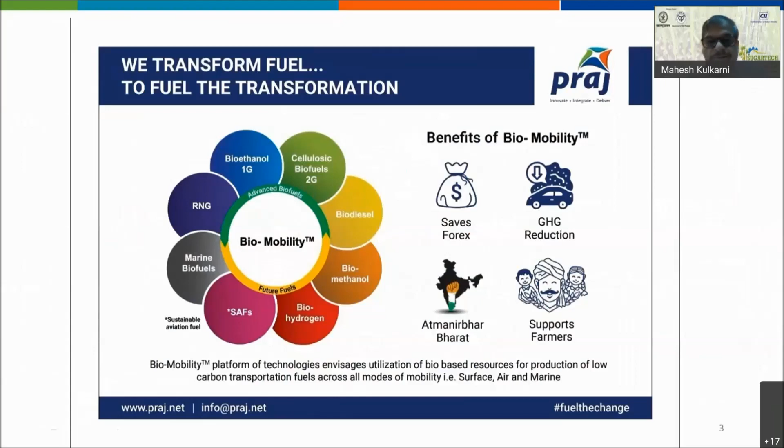If you see today, the sugar industry has a dilemma in context to policies and government initiatives. Perhaps there is surplus sugar in the market, then there is a dilemma that sugar mills are operating seasonally. So whether there will be availability of alternate feedstock for the production of ethanol, which is the need of the hour in context to the ethanol blending program.

Then, as very rightly mentioned by Narendra Mohan sir, statutory compliance for zero liquid discharge. Some plants have conventional technologies like biomethanation followed by BMSW evaporation and composting. But now mandatory is the incineration boiler route, where you have to completely burn the concentrated spent wash into ash and generate steam and power, managing the overall balance in the sugar industry as well as the attached ethanol plant. The fourth important challenge in front of the sugar industry is water scarcity and carbon footprint.

Over a period of time, we are always talking about water scarcity, especially for the distillery, which is designed for zero liquid discharge. In that context, we have to recycle all the recycle streams available in the process plant and manage the problem of water scarcity.

On the other hand, there is one more point which is perhaps unaddressed by the sugar industry or ethanol industry in India, that is the carbon footprint. Today we are talking about greenhouse gas emissions, and we are exhaling carbon dioxide through our fermentation plant, contributing to GHG emissions. It's not only carbon dioxide, but VOCs, volatile organic constituents, that also go out into the environment. So we are very much adhered to the Paris Accord in context to carbon footprint. You must have seen in Glasgow that our government is very bullish on achieving the carbon footprint targets.

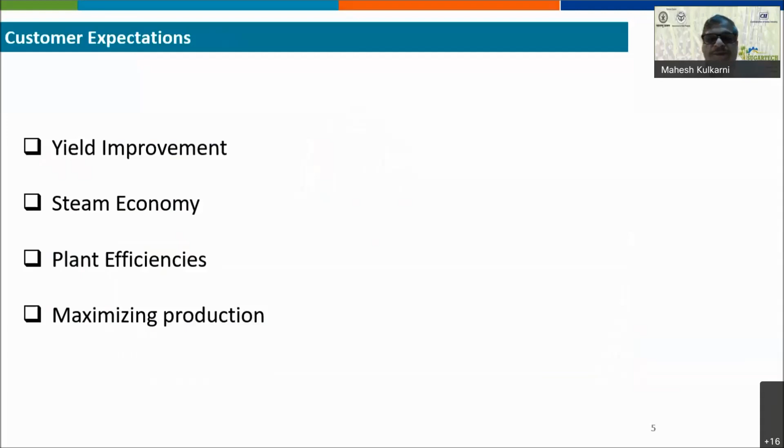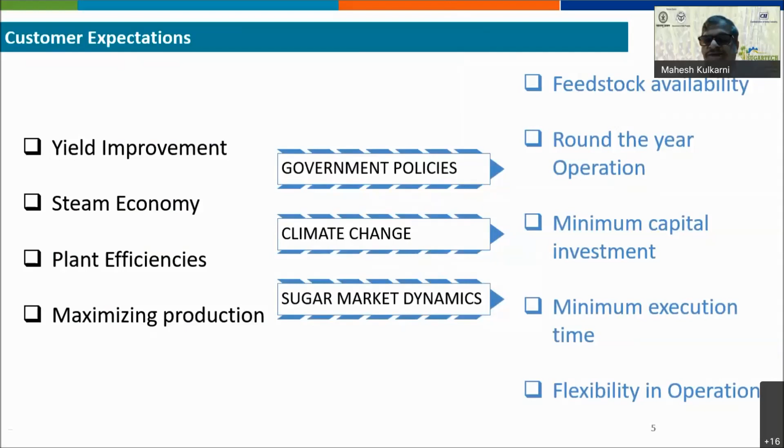So in context to that, what are the customer expectations? Perhaps yield improvements, steam economy, plant efficiencies, maximizing production—that are given. But most important, the expectations are feedstock availability. Can we operate the plant round the year? How can I increase the capacity of the existing facility with minimum capital investment? What will be the execution time? Because there will be tenders coming up for the supply of ethanol.

So we want to produce ethanol with higher capacity using the existing assets within the minimum execution time. And most important is the flexibility in operation. When I say flexibility in operations, today we are very much focusing on a plant designed for multi-feedstock. So it is not only the raw materials available from the sugar industry, but also alternate feedstock, including grains.

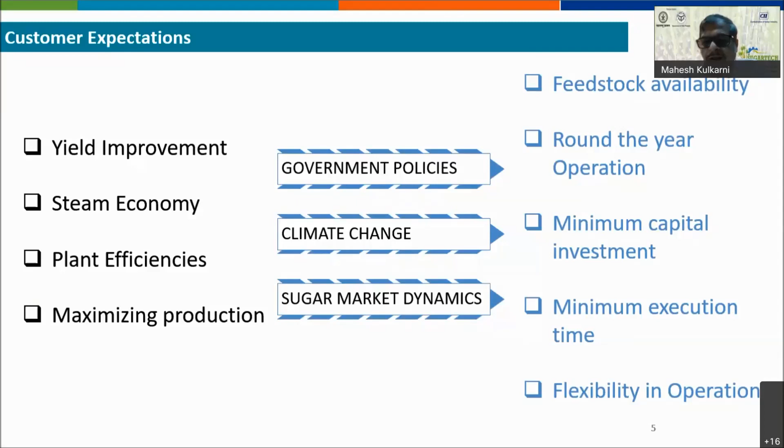So today's scenario, to achieve this demand, we have to design a plant in the context of multiple feedstock. As far as Praj is concerned, Praj is perhaps the only company who has studied feedstocks across the globe, and more than 7,000 samples have been collected and tested at the Praj Matrix Research and Development Center. This data has helped Praj develop advanced technologies, accommodate various recycle streams into the process plant, and deliver efficiencies as well as yield.

Praj being an innovative company, we have proven the technologies. We have commercialized many disruptive technologies since the company started, perhaps from 1985, and every year we are launching new technology. We are commercializing technologies for the sugar and ethanol industry.

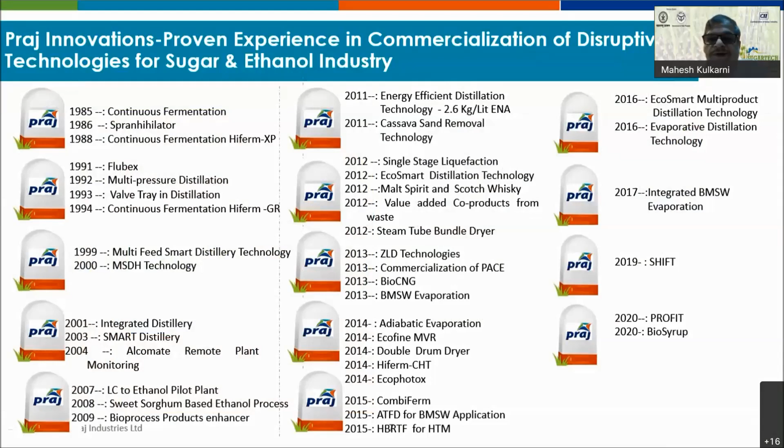So for value maximization in the context of the sugar industry, what are the various feedstocks available to convert into ethanol? Perhaps molasses, C, B heavy molasses, sugarcane juice, sugarcane syrup, and for new government policies, we can also use bio syrup. That way we can reduce sugar production and divert that sugar for round-the-year operation of the distillery.

So sugarcane syrup and bio syrup would be the add-on raw materials coming from the sugar industry. These multiple feedstocks help in asset utilization as well as giving flexibility to run the distillery for round-the-year operation, meeting environment norms with appropriate technology, and connecting to the future production of multi-feed and multi-products.

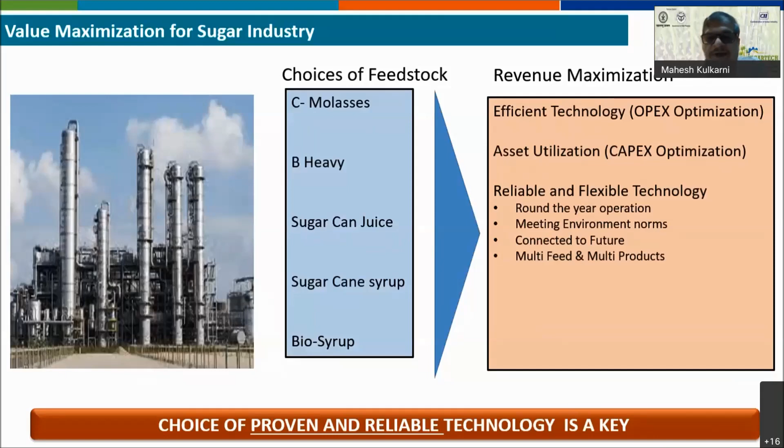So today we are talking about only beverage alcohol, but today the distillery complex is well upgraded with advanced technologies and can flexibly produce not only beverage alcohol or fuel ethanol, but including pharma and perfumery grade ethanol with advanced technologies.

So when we are talking about sugarcane syrup as a feedstock, definitely there are advantages. Using sugarcane syrup, we can run the distillery for extended days of operation along with C molasses, giving an opportunity to maximize production of ethanol. Also, this feedstock doesn't have any dependency on other feedstock or fuel. It also gives flexibility in operation in balancing sugarcane production with ethanol production. Most importantly, it increases capacity by up to 50% with minimum investment.

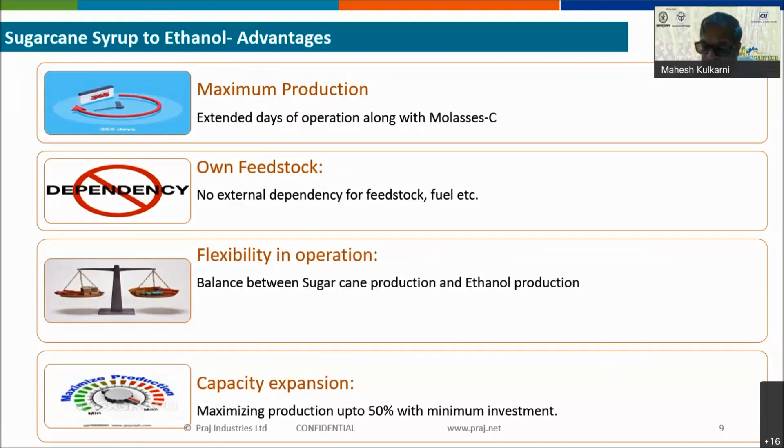But there are certain challenges when we spoke to various industries, and we received feedback that there are certain challenges when using syrup as a raw material. What are the observations or feedback from the sugar industry? Almost 8 to 10% lower ethanol yield. Then almost high spent wash generation, especially 6 to 6.5 liters per liter of alcohol. And it has low total solids because there are no more inorganic solids, unlike molasses C.

Another important thing is the low spent wash concentration going to the boiler, because today most distilleries have an incineration boiler as the zero liquid discharge effluent treatment system. The concern is that spent wash concentration is 40 to 45% using existing evaporators. Another important thing, especially in context of fermentation, is that sugarcane syrup is devoid of minerals and nutrients, which increases fermentation time and demands addition of supplementary nutrients into the fermentation.

Higher support fuel consumption in the boiler due to high evaporation duties, which I mentioned earlier. Frequent corrosion of some equipment in the ethanol dehydration plant. Extended time cycles in fermentation because of deficiency in nutrients. And most important, contamination of the syrup during transportation from sugar mill to sugar distillery. These are the major concerns shared by the industry in connection with syrup challenges.

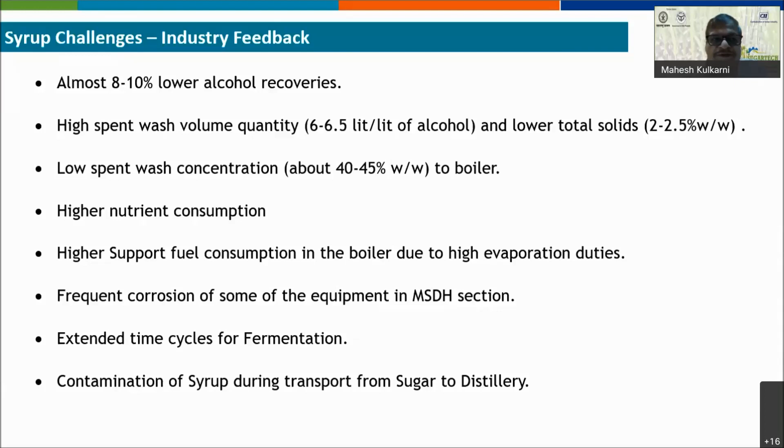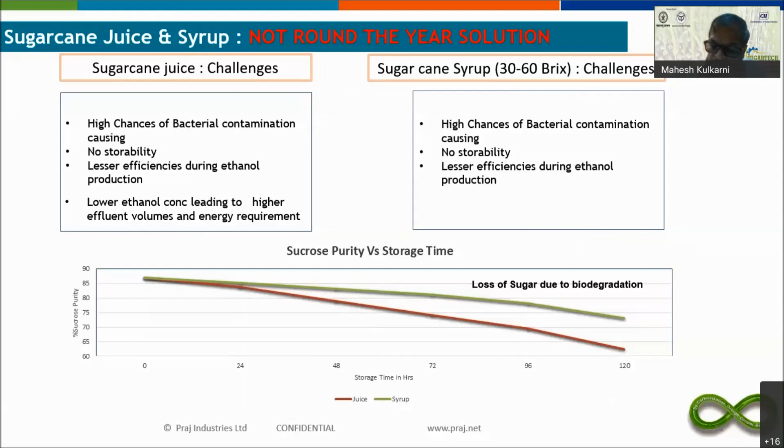So perhaps sugarcane syrup cannot be said to be the option or feedstock that gives a round-the-year solution, as mentioned, due to some challenges, especially contamination. There is no possibility of storability of this syrup in storage tanks, and there's less efficiency during production. What we have seen in the storability of syrup is the purity versus storage time - there is a loss of sugar during storage because of bacterial contamination.

That's why Praj did the work at the Praj Matrix Research and Development Center and developed the technology called bio syrup. This is a proprietary technology developed by Praj.

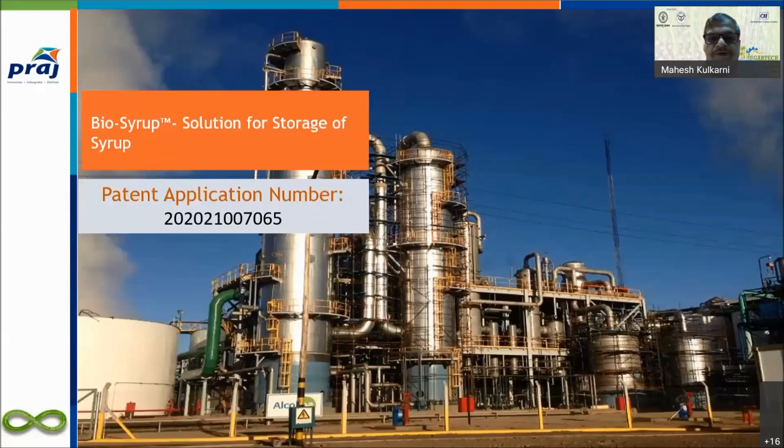Biosyrup is the only solution in context to the storage of cane syrup in the storage tank. Biosyrup is nothing but inverted sugarcane syrup, concentrated up to 82 to 85 degree Brix to maximize the shelf life of the cane juice.

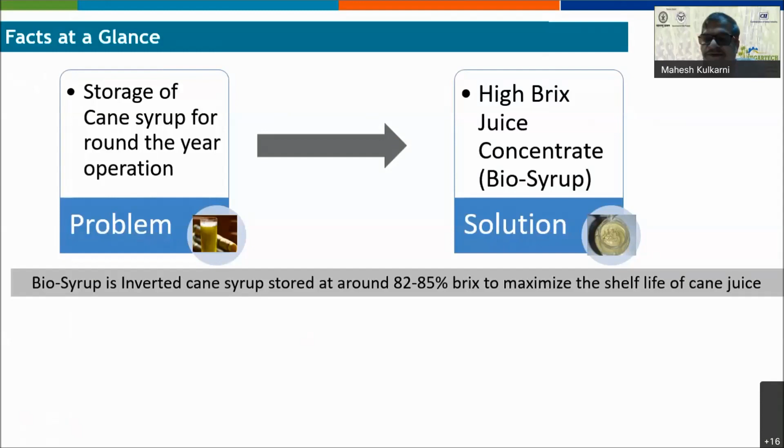Praj invested money in the installation of a commercial demo plant, because Praj never launches technologies unless they've been proven at the pilot scale and at the commercial demo plant. So we have success stories. Even in the second generation, we have set up a commercial demo plant near Pune.

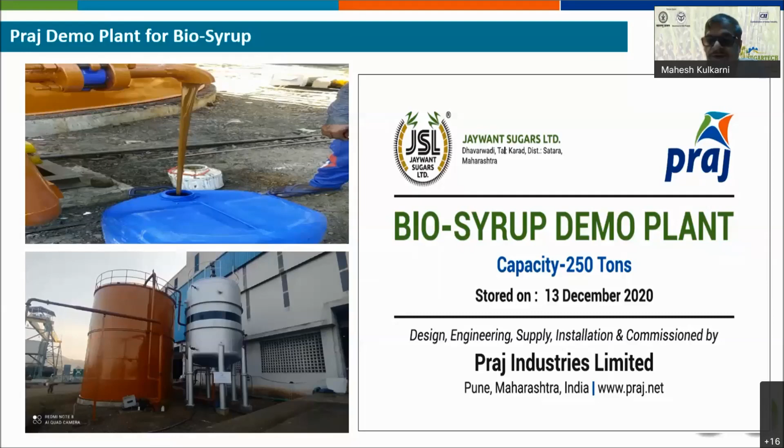We invested money and set up a plant at Jaywant Sugars Limited, and we have proven that the syrup can be stored in storage tanks. The quality of the syrup stored in the storage tank has been tested, evaluated, and approved by the Vasantdada Sugar Institute, which confirmed there is no loss of sugar even during 6 months of biosyrup storage in the existing plant conditions.

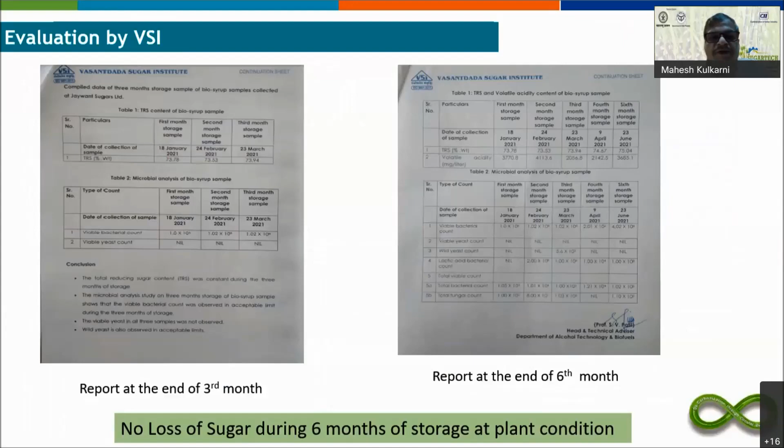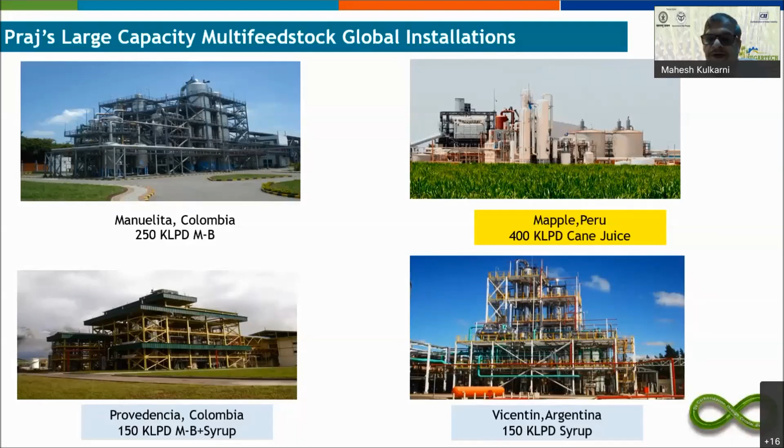For multiple feedstock based on syrup as raw material, we have multiple installations across the globe. In Colombia, we have multiple plants with a capacity of 250 kiloliters per day, operating on B heavy molasses as well as syrup. In Mapple, Peru, it's a 400 kLPD sugarcane juice to ethanol plant. And in Argentina, we have 150 kLPD. So there are multiple references based on sugarcane syrup across the globe.

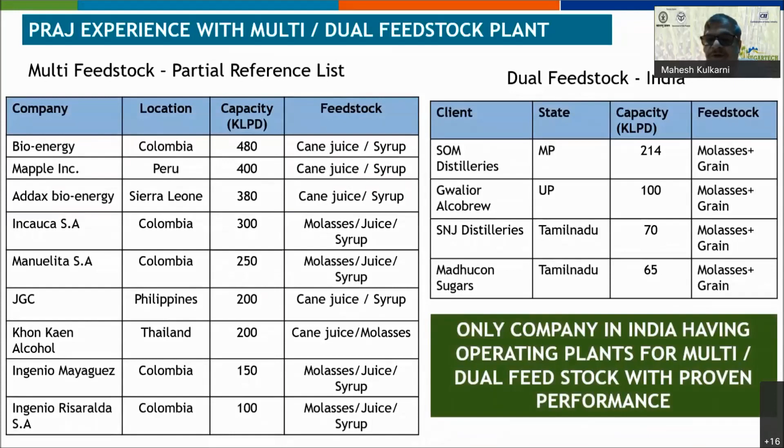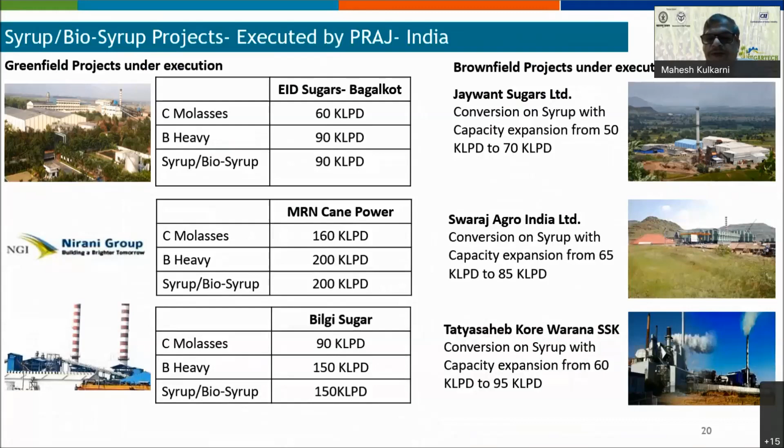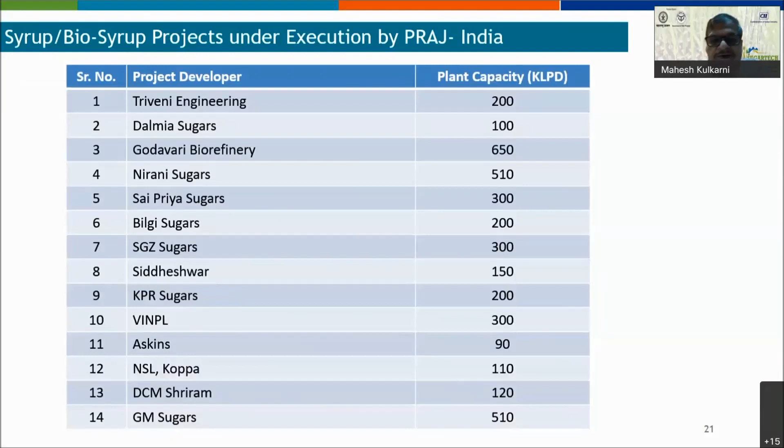Praj is perhaps the only company having multiple installations operating on multiple feedstock or dual route feedstock with proven performance. Some of the projects executed by Praj in India are EID Sugars, MRN Power, Bilgi Sugars, Tatyasaheb Kore, Swaraj Agro India, and we have multiple projects under execution based on sugarcane syrup or biosyrup as a feedstock in India. Almost we are executing 14 projects of large capacity based on syrup or biosyrup as feedstock.

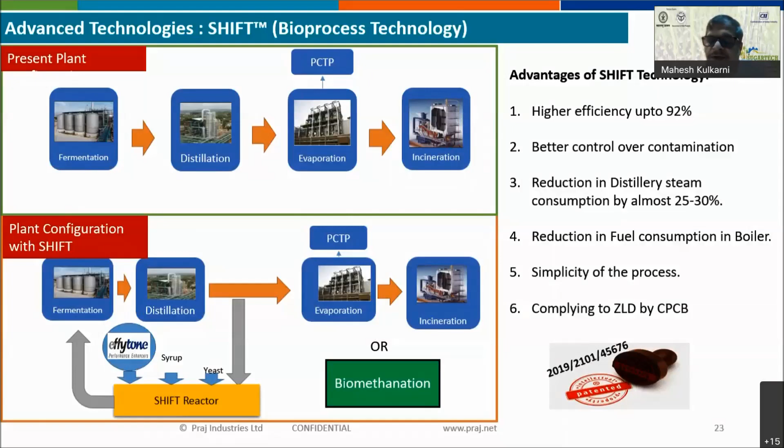Coming to disruptive technologies for sugar and ethanol, which can assist in decarbonization — emissions or carbon footprint is one of the most important points. We have advanced technologies like Shift, a fermentation technology which reduces steam consumption almost 25 to 30%, and also reduces fuel consumption in the boiler. It's very simple and compliant with zero liquid discharge as per CPCB. That's an innovative fermentation technology to reduce the carbon footprint.

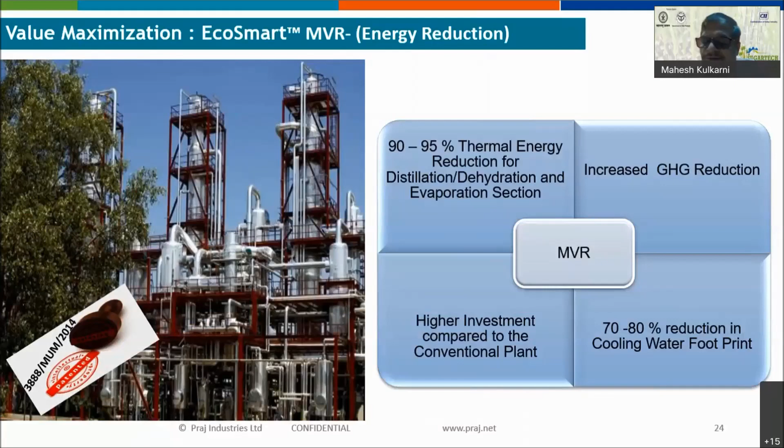Another innovation in evaporation and distillation is the application of mechanical vapor compression, which can reduce steam consumption almost 90 to 95% in the overall energy-consuming sections — distillation, dehydration, and evaporation. Most importantly, it reduces 70 to 80% of the cooling water footprint.

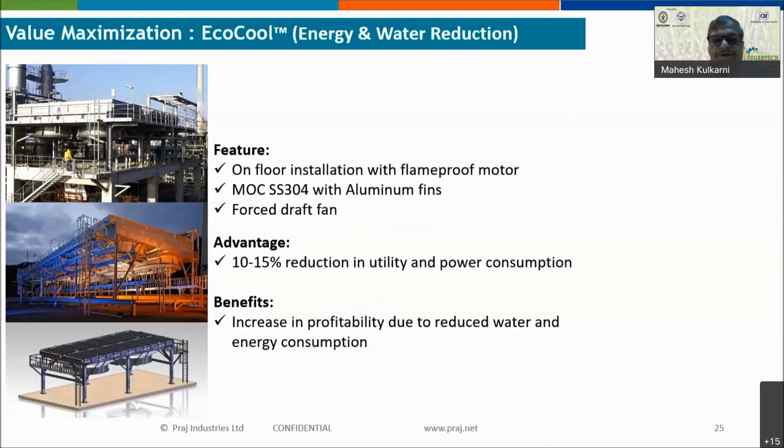Another decarbonization innovation is the EcoCool technology, which uses an air-cooled heat exchanger. This gives almost a 10 to 15% reduction in utility and power consumption, and increases profitability due to reduced water and energy consumption.

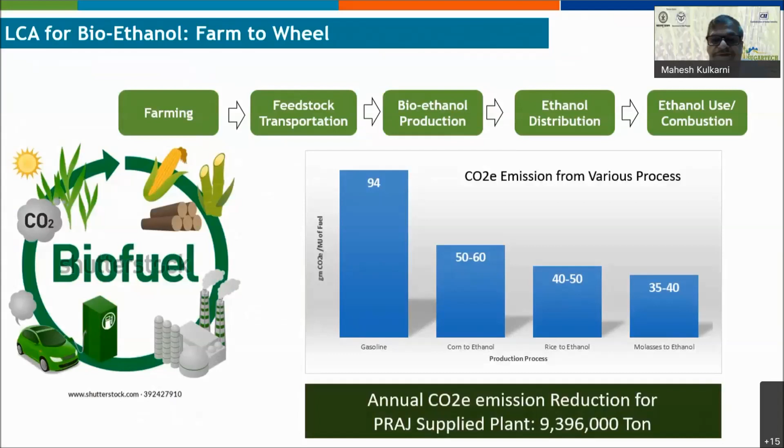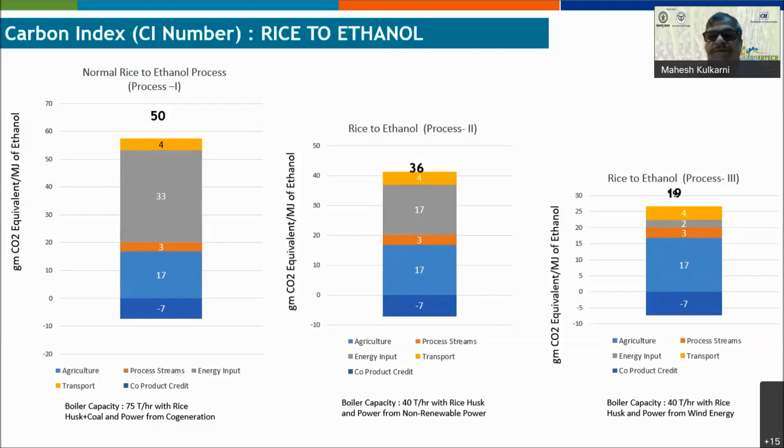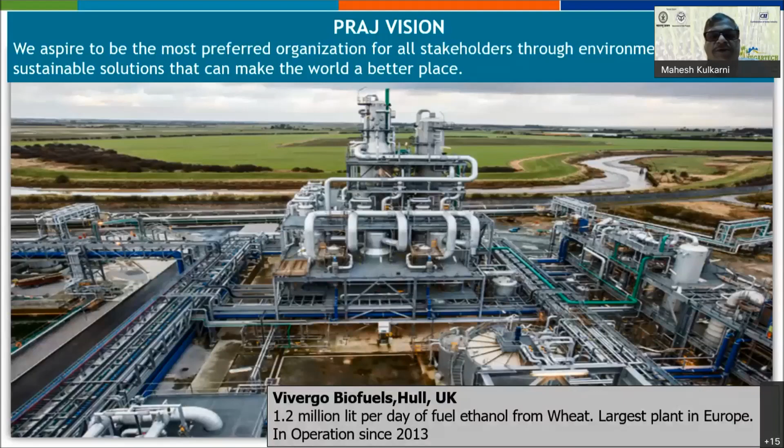That is Praj's vision — to aspire to be the most preferred organization for all stakeholders through innovative technologies and sustainable solutions that can make the world a better place. We are always focusing on technologies like biosyrup, as well as sustainable technologies which can enhance decarbonization and make this planet better for all of us. Thank you very much.